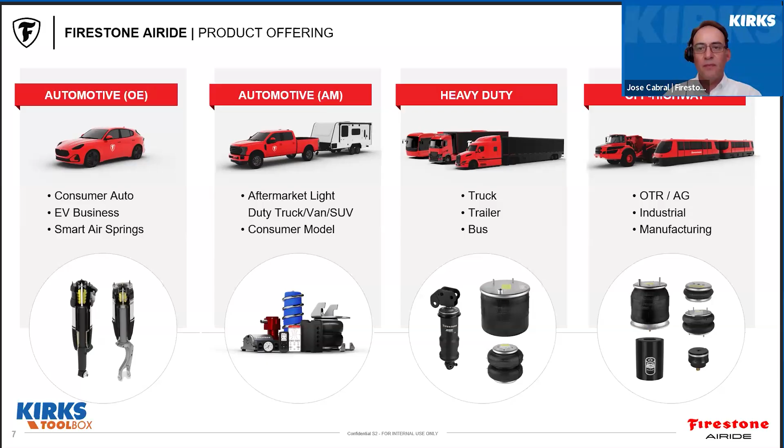Moving on into the product, specifically the type of products that we make, we have the 1T reversible sleeve. This is very popular for primary axles for truck, trailer and bus applications. This is ideal for high load and high travel applications.

Moving on, we have the convoluted design next to it. We are showing there a double convoluted. So that's for auxiliary axles and liftable axles. They provide a strong load carrying capability and also offer a compact packaging where the spacing is limited.

Last but not least, we have our sleeve designs, which are more for cab, seat applications, and front steer axles. Those are engineered for vibration isolation, improved ride comfort, and reduced driver fatigue.

On the right side, we have the nomenclature of our air springs. We have those cutouts for the 1T and the convoluted. And I'm going to put emphasis on the main components for the 1T design, which will be the bead plate, which is a steel plate permanently crimped to the bellow. That's number 5. Number 6 is the bellow by itself. That's the heart of an air spring. And I'm going to explain later on in the slides how we make those bellows.

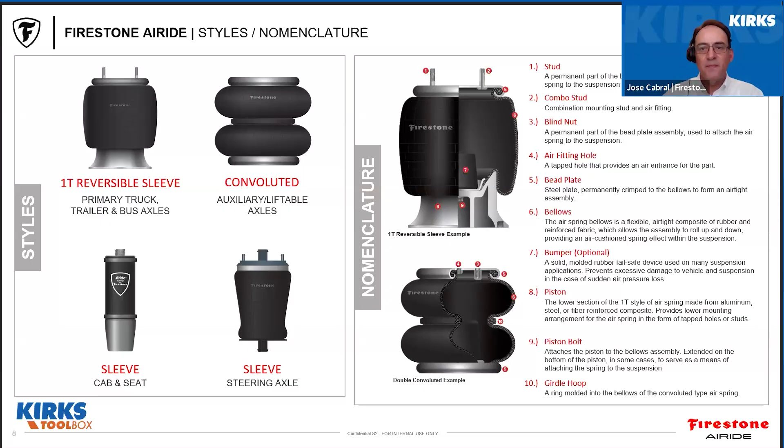Now, we have hundreds of part numbers in our portfolio. In order to make it simpler for customers, we group all those part numbers in 4 major categories. Starting from the front, we have the W26s. That will be for front steer axle applications. Then we have the W02s, which will be for cab and seat applications.

And the W01s, that will be the most common and the highest volume we produce, which will be for truck, trailer, and bus suspension applications, as well as for lift axles and tag axles.

And last but not least, we have a group which is the WC1, and that will be for some specific components, part of our assembly, that in some cases are available for replacement, meaning it could be like the pistons or primarily hardware used in our assemblies.

Moving on, as far as the benchmarking. Here we have how we make the bellow of our air spring. It starts with an inner liner made out of calendered rubber. So this is what offers the airtight core of the full assembly.

And then it is followed by the first ply of fabric reinforced rubber on a specific angle. And then the second ply will be at an opposite bias angle as part of this process, because this specific angle is going to provide the strength, the flexibility, and the extension of this bellow.

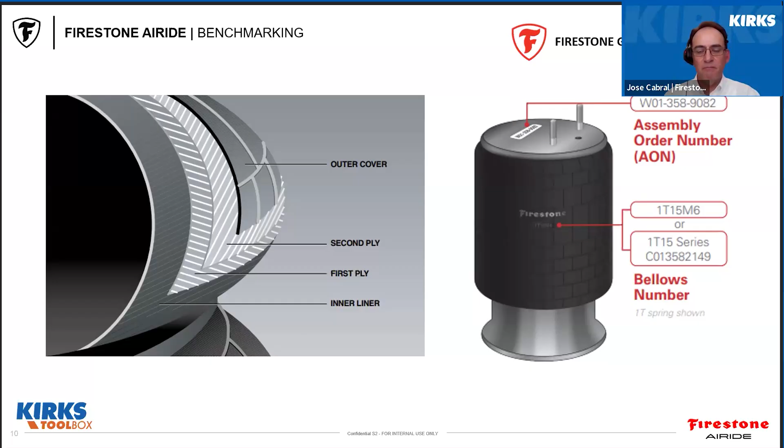Moving on, additional benchmarking of critical components. We are looking here on the left side at the bead plates that we use in our assembly. We use a coating called trivalent chromium, which provides strong corrosion resistance and protects the metal from harsh road and environmental conditions. You can see also how we test those conditions up to 200 hours of salt spray, resulting in very good results in regards to the protection that it offers against that testing.

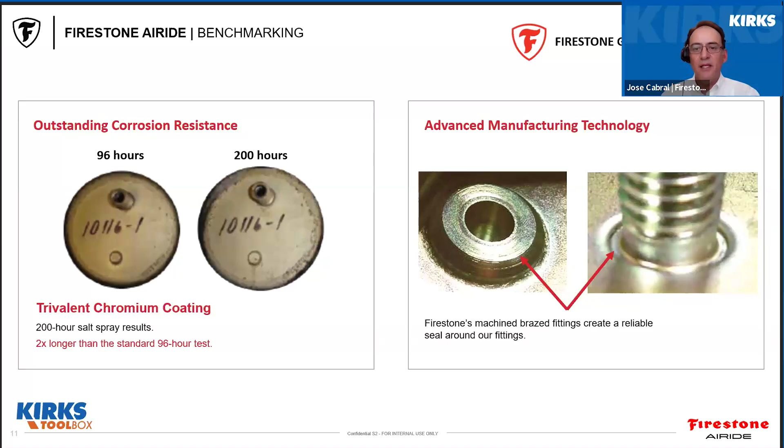We also use, on the right side, what we call advanced manufacturing technology, called the brazed fittings, which create a solid permanent bond between the fitting and the plate. Together, the coating and the brazed fittings help deliver the durability and leak-free performance Airide springs are known for.

Last but not least, another important design in our assembly is the pistons. We produce our pistons with advanced molding technology that gives a precise geometry and consistent performance. We also use molded-in studs for a stronger, cleaner, and more reliable connection. All this results in greater durability, fewer failures, easier installation, and long-term performance.

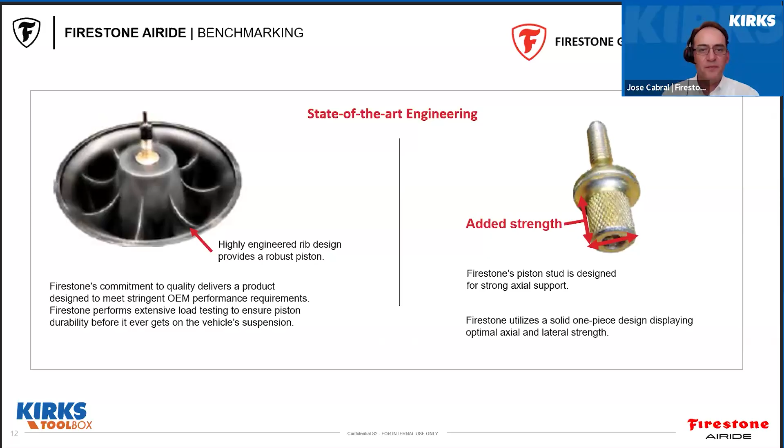Now I'm going to take you to our website and show what tools we have available there to help customers look up any kind of product information, technical data, as well as how to search products.

All right. So our website is www.firestoneairide.com. Here we are in the main page, and you can go straight from the top tabs, or you can always scroll down and select your segment. For the purpose of this webinar, I'm going to pick heavy duty, which is the core of our business. You keep scrolling and you will find the different segments: truck, trailer, and bus. Every segment will have the same 4 sections: aftermarket catalog, where to buy, product search, and about air ride suspension.

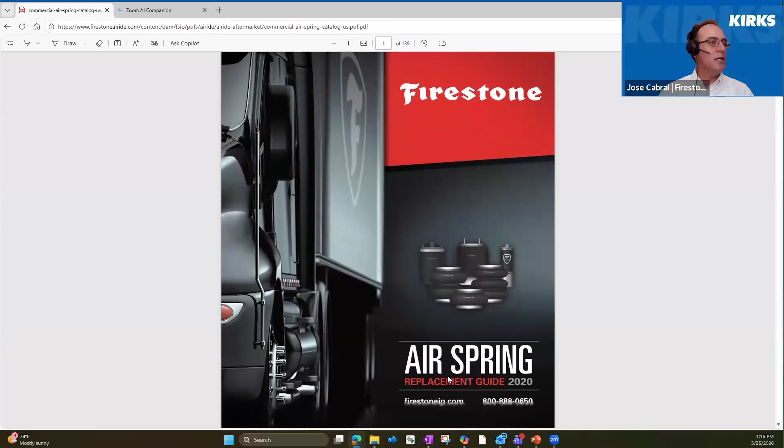First, I highly recommend downloading our aftermarket catalog. This is a very comprehensive material, and it contains a lot of information about our product line. You can download it as a PDF, save it on your computer, or use it directly from the website. This is the latest version, 2020, and in the table of contents we have 3 main sections: components, part diagrams, cross-reference using OE part numbers or competitor part numbers, and the last section, warranty and preventive maintenance.

Going back to the website, the other important section for product search is this one here, find a product. When we click find a product, same, we go to our segment, heavy duty, and we have 3 different ways to look up parts. It seems like it's not working. Oh, there it is. So if we are looking for specific dimensions of our assemblies, and we know the part number, the AON, we can use this straight.

Product number. For the purpose of this webinar, I have a part number that is common in transit applications, which is W01-358-5298. When you click the magnifier, if it pops up, that means the part number is active in our system, most likely sellable and available for aftermarket. When you click to see more details, you will see critical dimensions on a section view of the full assembly, the bead plate, a top view, and a view of the piston as well.

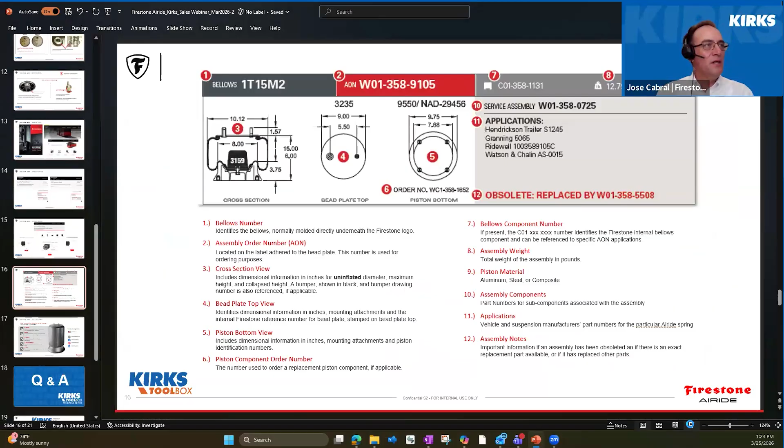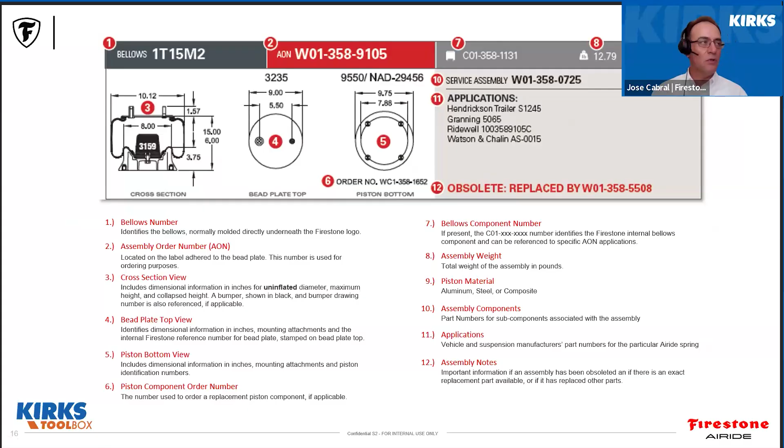I'm gonna go back again to the presentation. I am skipping these slides. Essentially what you will see on those schematics is all this information that we have been talking about, but there is more information available sometimes included in those searches: not only the application, but if the part has been obsoleted or replaced by any other part number, and if we have any service assembly, it will be there. For instance, number 6, which is the piston. I mentioned that we have a product category, the WC1s, for those serviceable components. In this case, the piston.

So I'm gonna wrap up my material right now, just to let the audience know why Firestone. What's our value proposition as a world leading supplier in air spring technology? Our Firestone Airide products are built to a higher standard. We are backed by industry recognized quality certifications. We design to strict OE level specifications, and we manufacture and deliver our products here in the United States. And behind every product is our customer service team, whether that means locating a product or answering questions about availability, warranty, or preventive maintenance.

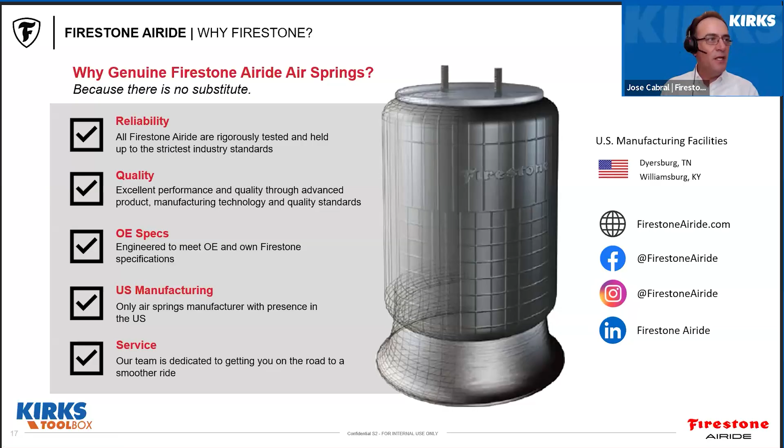We are here to help, and partnering with KIRKS has been a really good partnership. We started, but I think the future is bright. We continue collaborating for the success of both companies. We appreciate all the help Firestone has given us to grow this business, working side by side. Yeah, we certainly appreciate the support from KIRKS as well. I think we have very good opportunities to continue growing. And then I'm gonna turn this over to Linda for the questions and answers section.

Thank you, Jose. We do have 3 questions. Someone wants to know, what is the warranty of Firestone Airide aftermarket air springs? Can you hit on that one?

Absolutely. So in the past, we used to have a warranty of 3 years, right? That is a limited warranty based on defects in workmanship or materials. But a couple of years back, since our rate of warranty returns is so low and our reliability is pretty high, we know what we make. We have been in the industry for many years.

So we have extended our warranty, and as of today, we offer a 5-year warranty. Again, it's a limited warranty under normal conditions of operation, but it's a 5-year warranty against any defect of workmanship or materials. Well, 5 years, that's great.

Okay, we have 3 questions. I don't know if I mentioned that. The second one: what is the one thing on an air ride suspension that will ensure the proper operation of the air springs?

Yeah, there is this technical concept in air ride suspension systems, which is called the ride height. The ride height is a very critical dimension, and it will maintain the geometry of your suspension. The ride height is the distance between the bottom of the frame to the center of the axle. That specific dimension is set by the OE manufacturer. It's not set by Firestone.